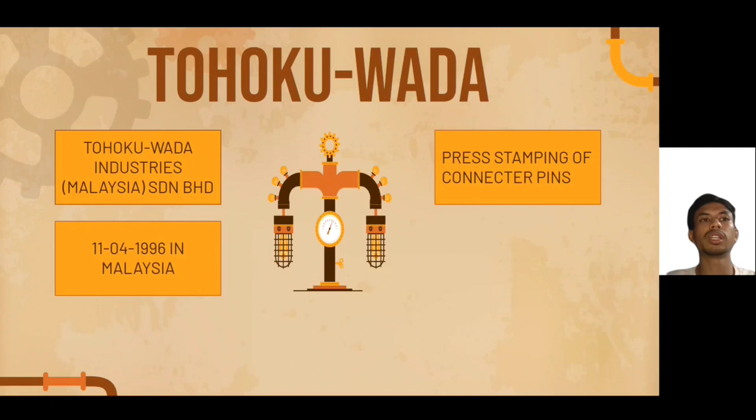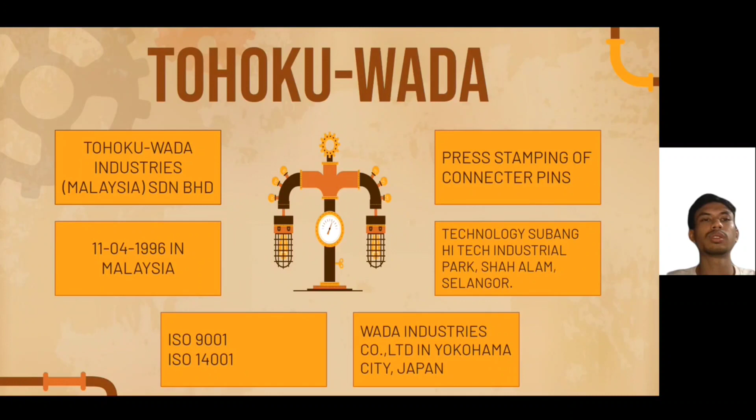This factory is located in Technology Subang Hi Tech Industrial Park, Shah Alam, Selangor. For environmental awareness, this company got certification for ISO 9001 and ISO 14001. The main shareholder is Wada Industries Company Limited, located in Yokohama City, Japan. That's all for our introduction. Next, I give the floor to Isfahan Julia to continue the presentation.

Thank you. So my name is Isfahan bin Julia and I am from group 4. Today we are going to talk about the connector pin. Let's go on to the next slide. For my part, I will be talking about the findings: the manufacturing process and the technology employed, the design concept and the quality assurance.

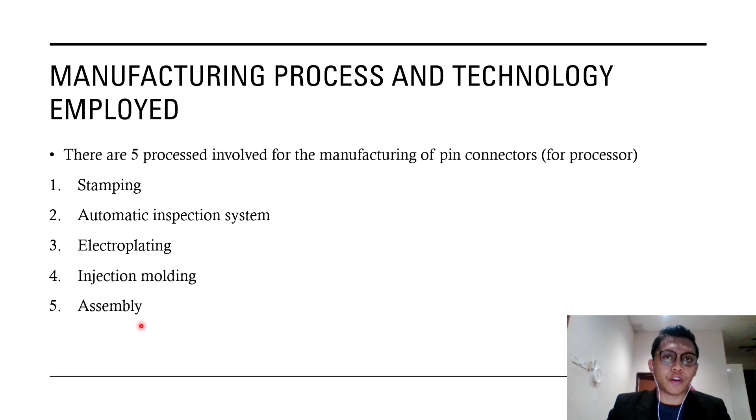In manufacturing process and technology employed, there are 5 processes involved in manufacturing the pin connectors made by Tohoku Wada Industries. We have stamping, automatic inspection system, electroplating, injection molding, and also the final assembly of the connector pin. Let's go on to the next slide.

So basically, the technology employed in the connector pin is that it is designed to be miniaturized so that it can conserve space and weight. When we design the connector pin to be small, it can deliver its intended application as a pin to deliver high levels of power and data.

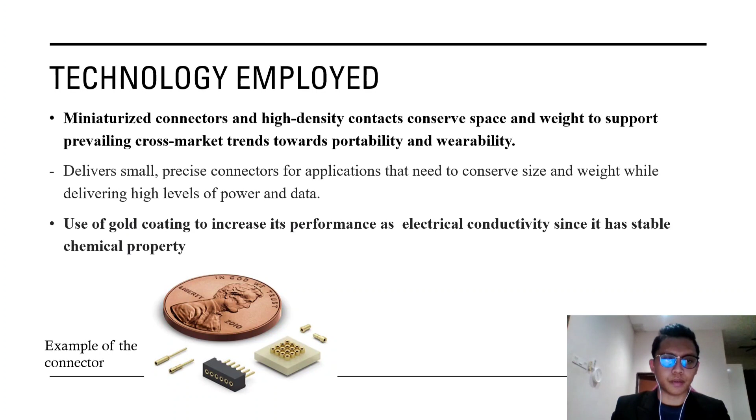Also, connector pins are usually coated with gold. This is done to increase their performance in terms of electrical conductivity, because gold has stable chemical properties. Imagine a material that has good electrical conductivity but poor chemical properties; the material would literally melt. This is not what we want in a connector pin. That's why we use gold coating or gold plating on the connector pin.

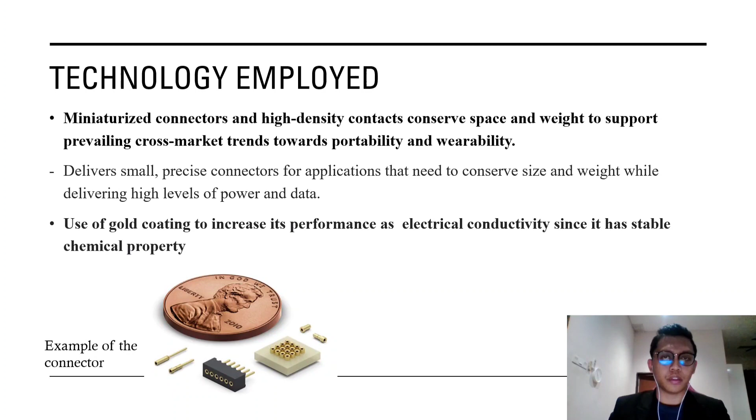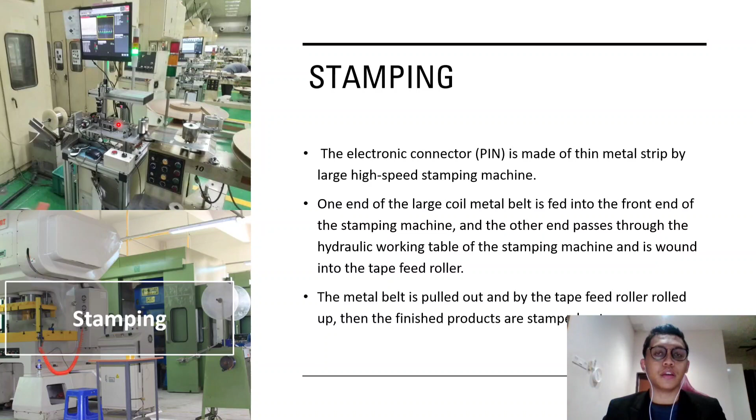As we can see here, this is the product, the connector pin. The connector pin is wound onto the tape feed roller and then goes directly onto the table of the vision inspection machine in order to detect any defects after stamping.

The second process after stamping is called the automatic vision inspection system. In this system, the connector pin on the work table is inspected using the front camera and the top side camera. These cameras capture images of the features of the connector pin that has just gone through stamping, in order to compare it with the ideal image of a connector pin stored in the computer's memory.

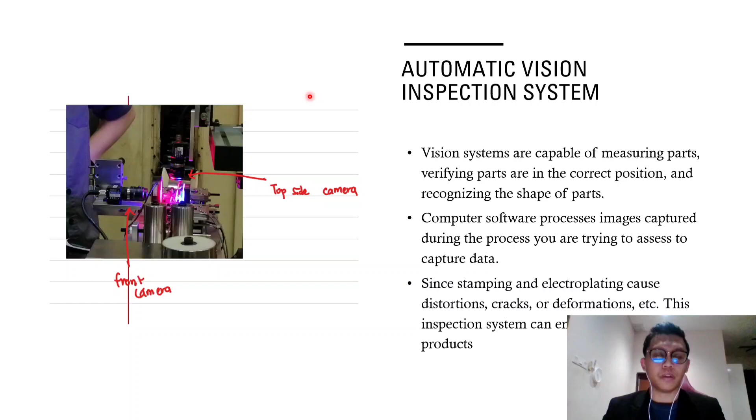If the newly manufactured connector pin has an acceptable range of score compared to the ideal image of the connector pin stored in the memory, then this connector pin will have a pass grade.

In the electroplating process, the connector pin would be coated with various metal coatings like nickel plating, tin plating, gold plating, etc. This is done to prevent oxidation and enhance the electrical conductivity of the connector pins, as well as to provide stable chemical properties to the connector pins.

Since the connector pin is usually used in electrical appliances to supply electrical energy, heat energy is bound to be produced, which would affect the connector pin itself. So the connector pin needs coatings so it could resist temperature change inside the electrical appliances so that it would not melt.

In the electroplating process, after the process has been done, the connector pins may experience defects such as distortions, cracks, or deformation. This is actually the same case with the stamping process, where the same defects can occur. So they need to go through the same process, which is the vision inspection machine. This also goes through the injection molding process as well.

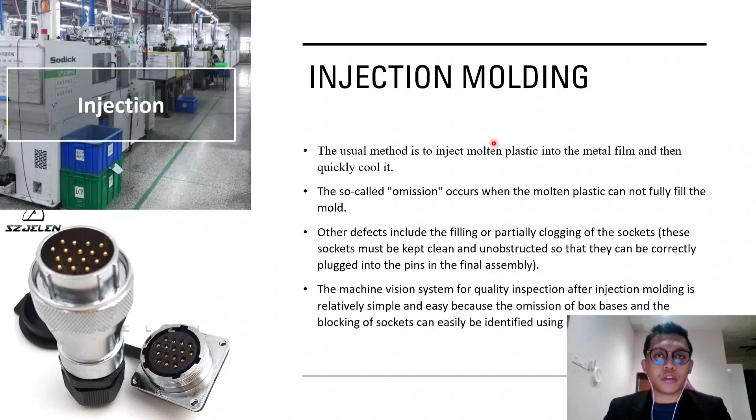The injection molding process is the last process for fabrication of the connector pin and its housing. So now we move on to the assembly process. In the assembly process, there are two ways to assemble the plated pins with the housing. The first is to insert the pins individually, meaning to insert one pin at a time. The second is by combining the pins, meaning inserting multiple pins with the housing at the same time.

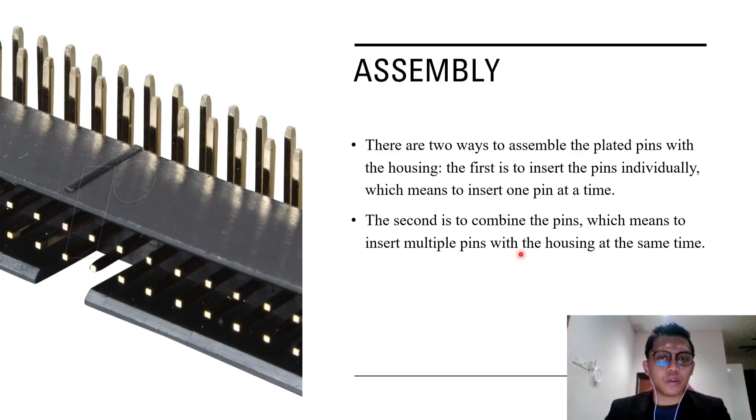When we talk about the design concept of a connector pin, basically it is a device used to connect and disconnect electrical circuits. Connectors have a structure of contact and housing, where the contact is usually used to make an electrical connection to the electrical appliances for supply of electrical energy, while the housing provides insulation for those who operate these appliances.

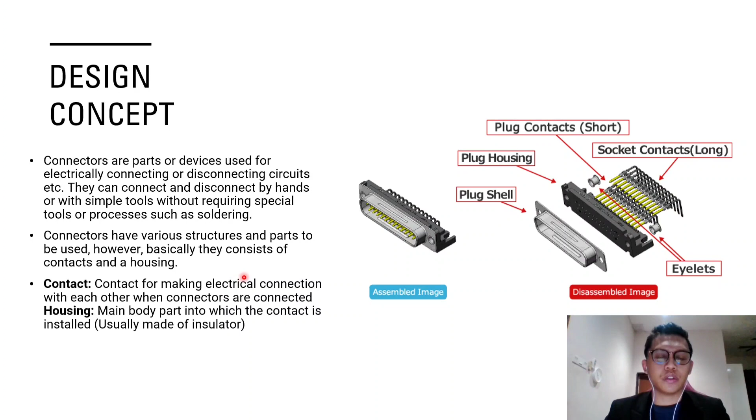In the fabrication of connector pins by Tohoku Industries, they implement quality assurance during the fabrication process of the connector pin. We can see that they implemented quality assurance through defect prevention using an automatic vision inspection system after the stamping, electroplating, and injection molding processes.

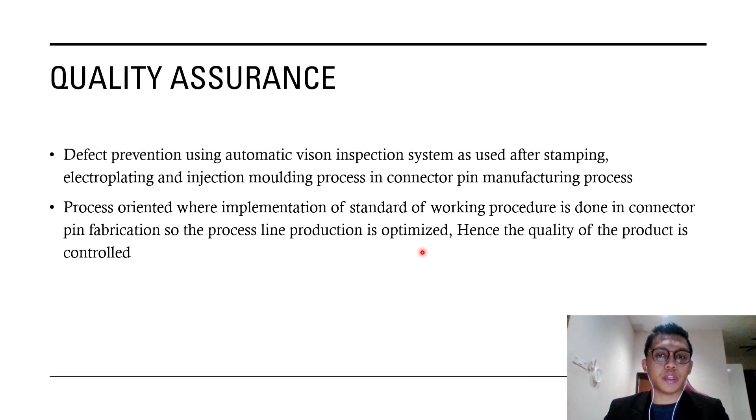Secondly, the fabrication process of the connector pin itself is process-oriented, where the implementation of SOP, or standard operating procedure, is done in order to optimize the production line and to ensure that the quality of the product is controlled.

That's all from me. Thank you.

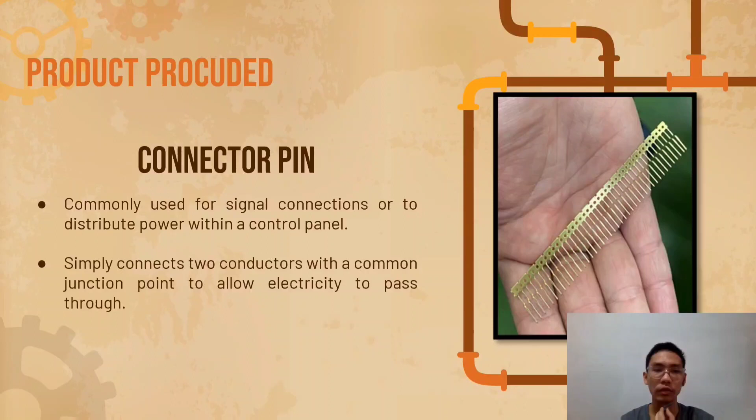What are the usages of connector pins? Connector pins are mostly found in electronic parts such as laptops, mobile phones, and automobiles. In laptops, connector pins are used in memory cards, memory sockets, and hard disks. Meanwhile, in mobile phones, they are used in LCD slots, battery connectors, and SIM card slots. Furthermore, in automobiles, connector pins are used in power steering control, airbags, and engine control.

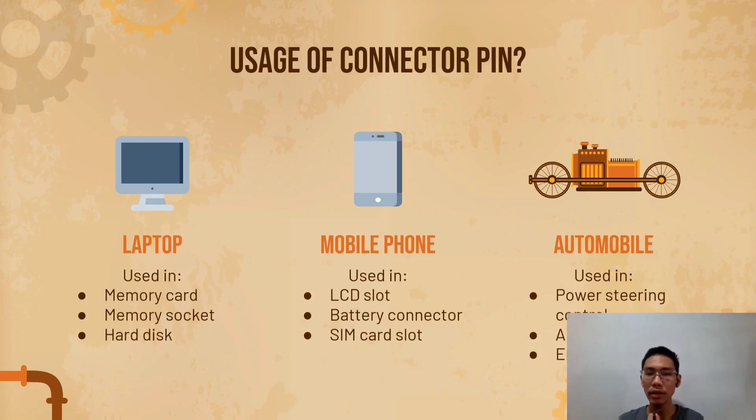Let's move on to the problem faced for the product. We found that product defect is the major problem that we face for the connector pin product. Product defect can be defined as an imperfection or abnormality that affects quality and function of the product.

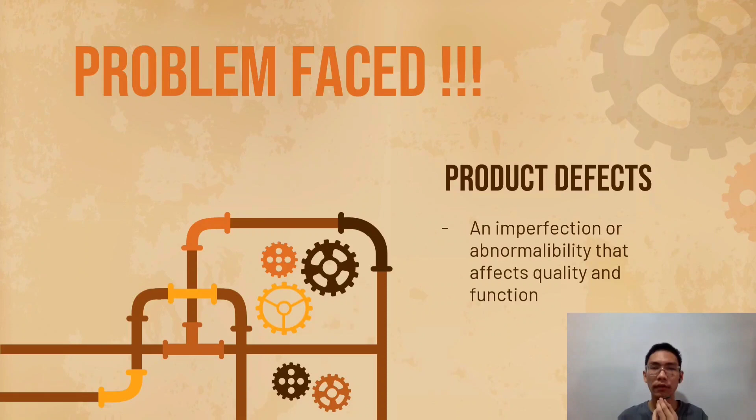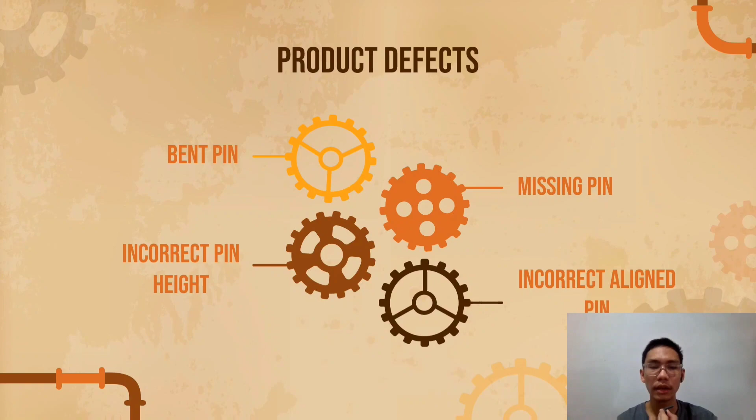Several product defects can be found in connector pins, such as bent pin, incorrect pin height, missing pin, and incorrect align pin. All these product defects can damage the mating connector during assembly process with other electric components. Here are some suggestions on how to improve the quality of the product.

First, we can use the pattern matching tool, which can help locate and classify pins and patterns. It can provide a suitable place, patterns, and location of the pins.

Next, we can use the telecentric lens to check the alignment of pins correctly. This telecentric lens can help remove the perspective effect such as bending. It can help make it easier to check that pins are all straight. That's all from me, thank you.

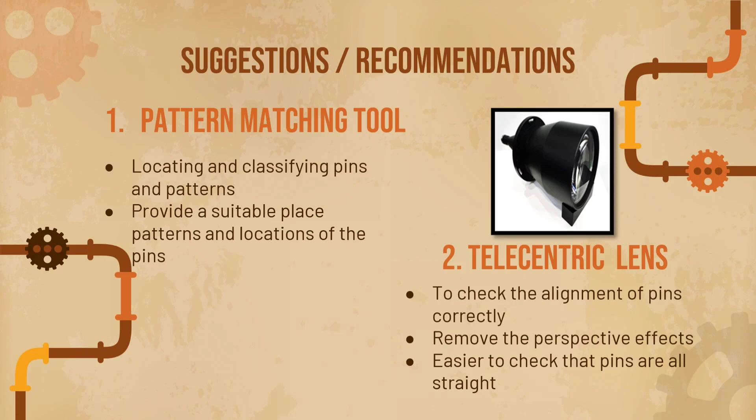What is the suitable manufacturing process to produce connector pins? Metal stamping. Metal stamping is a cold forming manufacturing process used to transform flat metal sheets into specific shapes. This complex process makes use of dies and stamping presses to convert metal into a new shape. During this process, the material will be subjected to pressure that will shape and shear the material into the desired shape.

One of the technologies used by Tohoku Wada is a metal stamping machine, which is widely used in production facilities and metal fabricators offering stamping services. It is a fast, highly durable, and cost-effective solution for large quantity manufacturing needs for both short or long-term production.

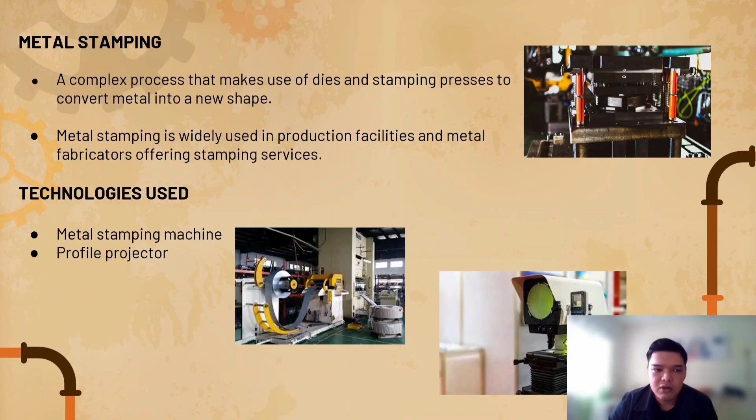A profile projector is also used by Tohoku Wada Industries. The profile projector is primarily used for measuring dimensions of the connector pins to ensure the quality is always met.

One of the problems faced from our visitation to Tohoku Wada is that the staff working there is lacking knowledge of the machines in the factory. For example, Mr. Sam, the person in charge of handling our tour around the factory, was struggling to answer some of our questions regarding the metal stamping machines.

The other problem is that they don't have enough manpower to handle the amount of metal stamping machines in the factory. Only a small amount of certain engineers can handle the machines. This will be a problem for the company if something were to happen to the machine and nobody can take immediate action. We would suggest Tohoku Wada give more knowledge to their staff regarding their machineries and hire more people that can handle the metal stamping machines.

Last but not least, some of the other products that can be produced by metal stamping are automotive parts. Metal stamping processes are used to create a range of essential automotive parts and are incredibly cost-effective solutions for manufacturing customized automotive parts. Some of the parts include horn buttons, steering wheel components, brakes, fuel injectors, and many more.

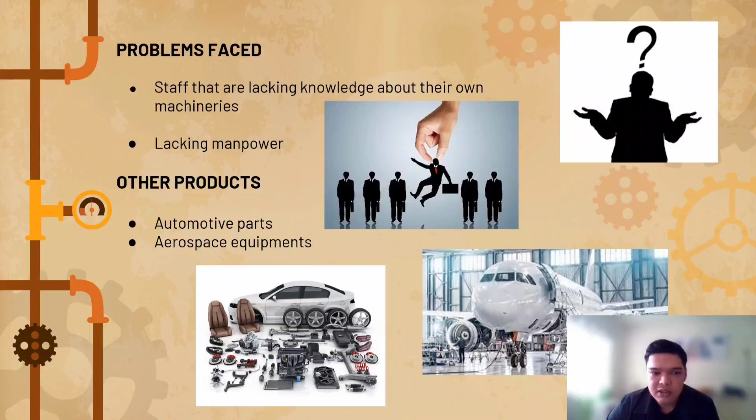Not only that, but because metal stamping can be used on many different types of metals, aerospace companies such as Hudson Technologies can work with a variety of high-grade aerospace materials such as aluminium 6061, titanium, and many more. Some of the equipment produced by Hudson Technologies include oxygen generating systems, military aircraft housings, and enclosures. That's all from me, thank you.

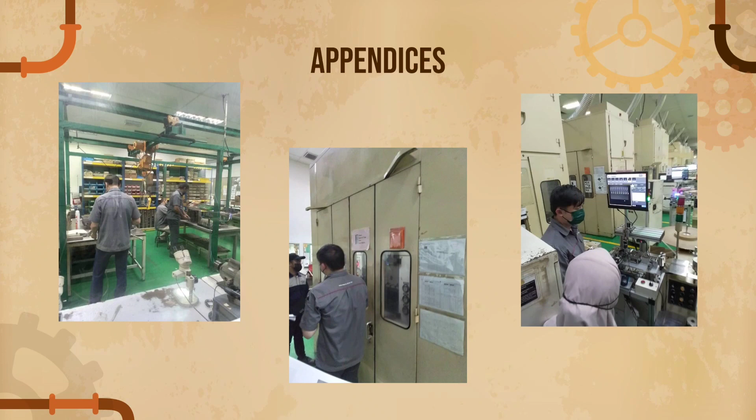Here are some appendices that we attach as evidence for our industrial visit to Tohoku Wada.